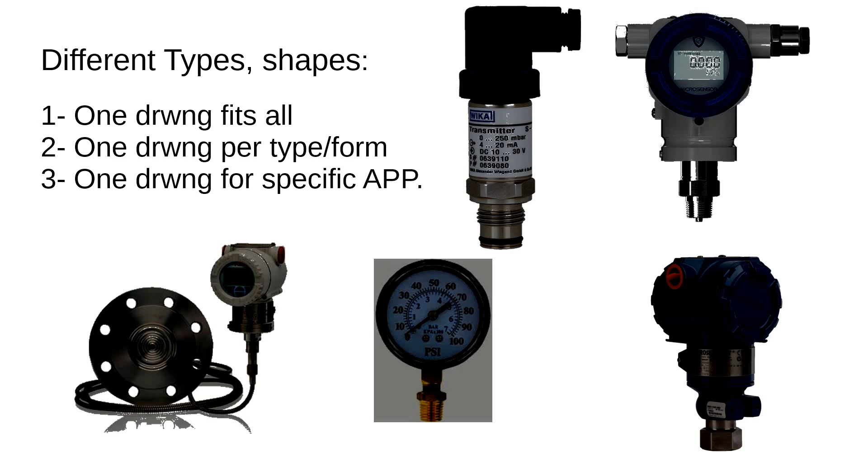Pressure devices come in different shapes and sizes. Our selection for a device depends on the application. The fluid in a pipe or vessel can be liquid, gas, vapor, or mixed. Some can be mounted directly on the pipe. Others, which have a diaphragm seal with capillary tubes or impulse lines, can be mounted remotely in a place that facilitates access for maintenance or provides better protection against high temperature, etc.

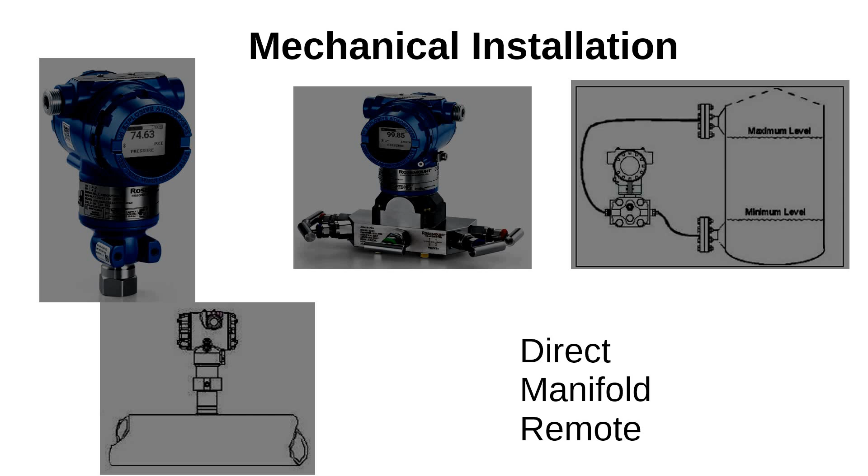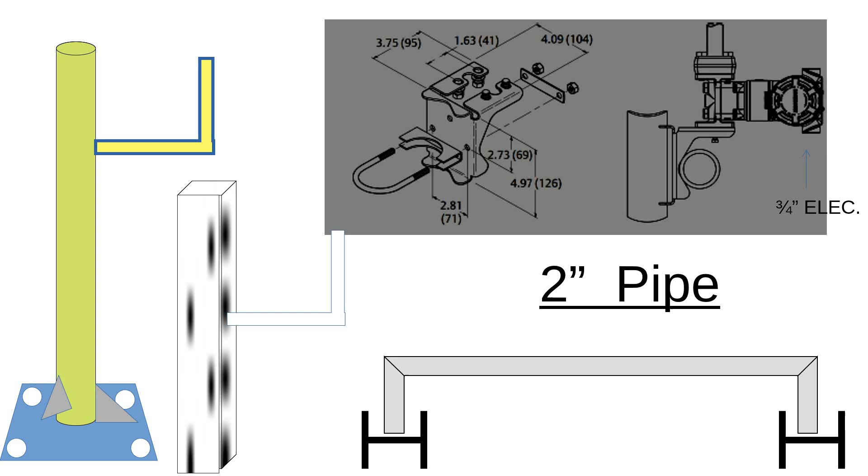Mounting the transmitter on a 2-inch pipe is one of the most used methods. A bracket is required, and there is more than one shape of these brackets. Since the 2-inch pipe stand can be used for almost any type of transmitter, the 2-inch pipe stand details should be explained in a separate drawing.

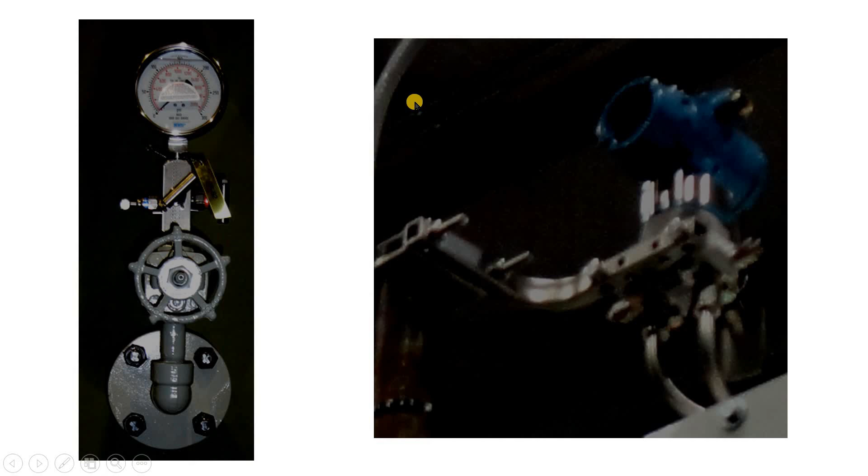Pressure transmitters are mounted on a 2-inch pipe between the structure beams. Here, the pressure transmitter is mounted on an L-shaped 2-inch pipe. Another shape of bracket for transmitter - the pressure transmitter is mounted using the L-shaped bracket. The pressure gauge in this case is directly mounted on the vessel. Please notice the isolation valve.

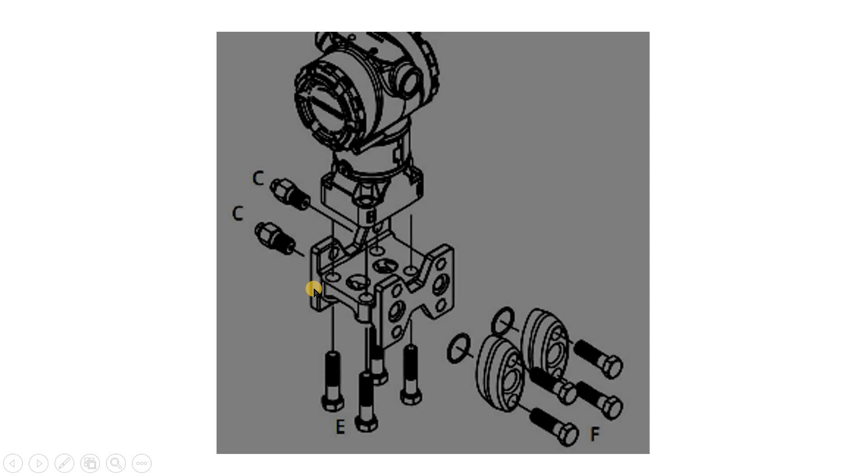If a manifold is attached to the transmitter, we can mount the manifold to the 2-inch pipe instead of mounting the transmitter itself. Here you can see two types of brackets together side by side: the L shape, and the normal or standard bracket, which we are used to seeing.

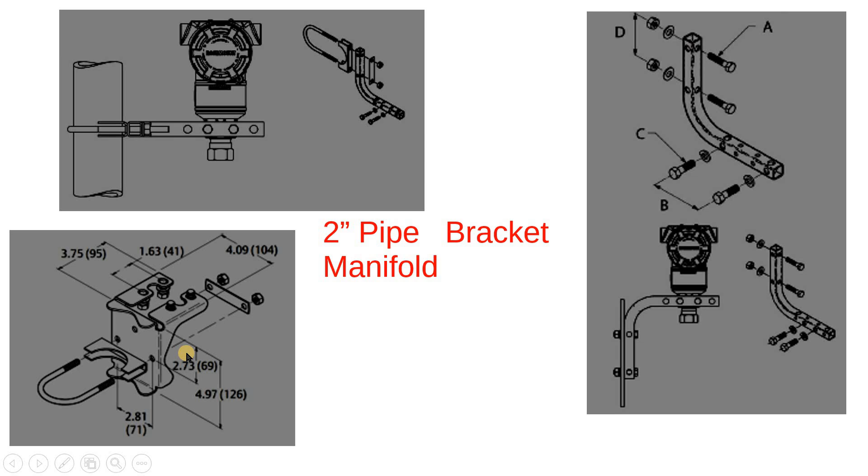Process connection: it is not recommended to install the device directly to the pipe. To maintain the pressure or do any maintenance for the device, you need to depressurize the line. Installing an isolation valve will not solve this problem, as there will be trapped pressure fluids between the valve and the device. So we need to isolate, and then we need to bleed this little piece between the isolation valve and the transmitter.

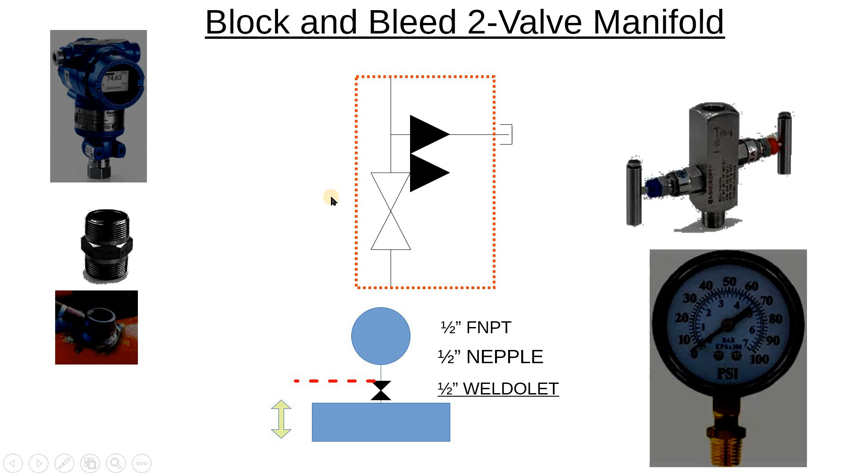This arrangement of isolation valve and drain valve can be achieved through piping or through a manifold. In most installations, the first valve on the line, pipe, or vessel belongs to the piping group scope. It's normally welded to the line, which will prevent accidental removal of the isolation valve, preventing something from going wrong. Anything above the first valve is in the instrumentation scope.

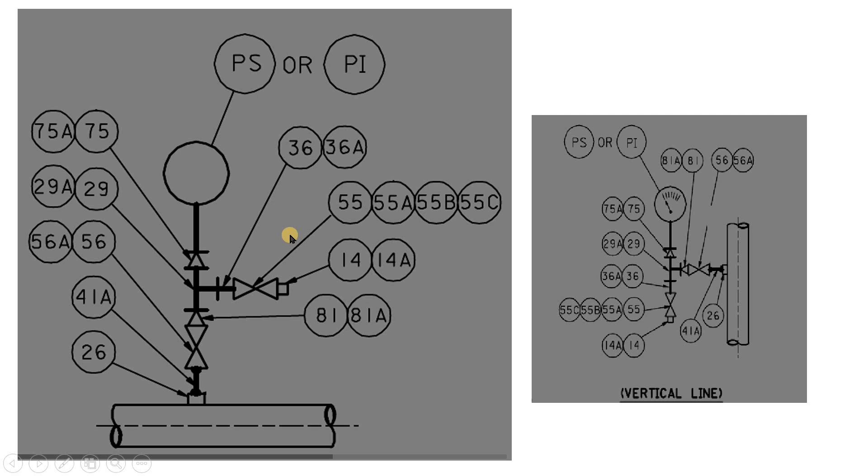Your starting points are the device and the pipe connections - this one and this one. Here the gauge is a 1/2 inch male connection and the isolation valve is a 3/4 inch female connection. You can work out whatever is in between those two fittings with fittings. You can see here, starting from bottom up: the first one is our isolation valve - this is the piping valve - and this is the instrumentation valve.

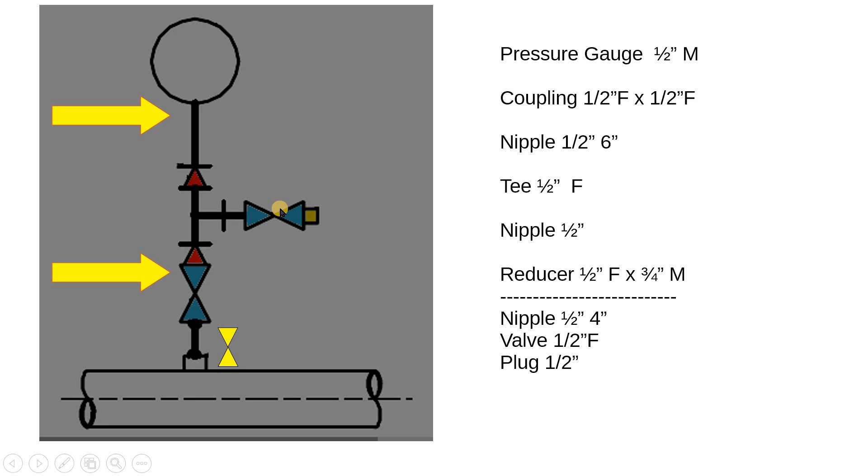So we can have the pressure gauge 1/2 inch, then we need a coupling which will convert the male to female, then a nipple, 6 inches, 1/2 inch, then you need a T, you need a nipple again, and then you need the drain valve, probably a reducer, and then a plug here. A similar arrangement can be seen here, but it's achieved by an isolation valve, or two-way valve.

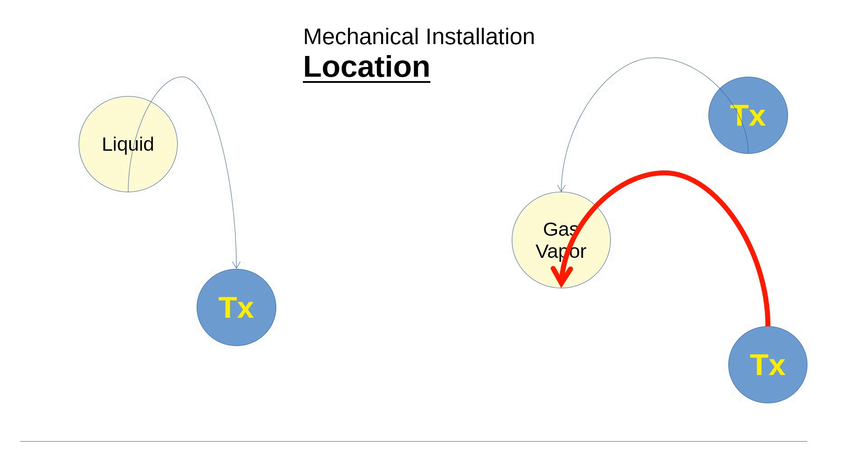For some applications, the location of the pressure device with regards to the process connection is crucial for correct device reading. For liquid service, the impulse line shall be free of air. For gas service, the impulse line shall be free from condensate. As such, the mounting location of the device, below or above the process connection, shall be studied.

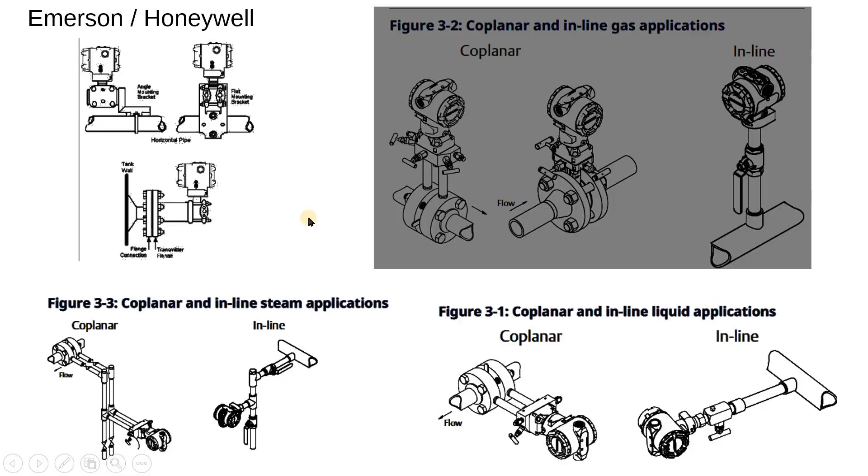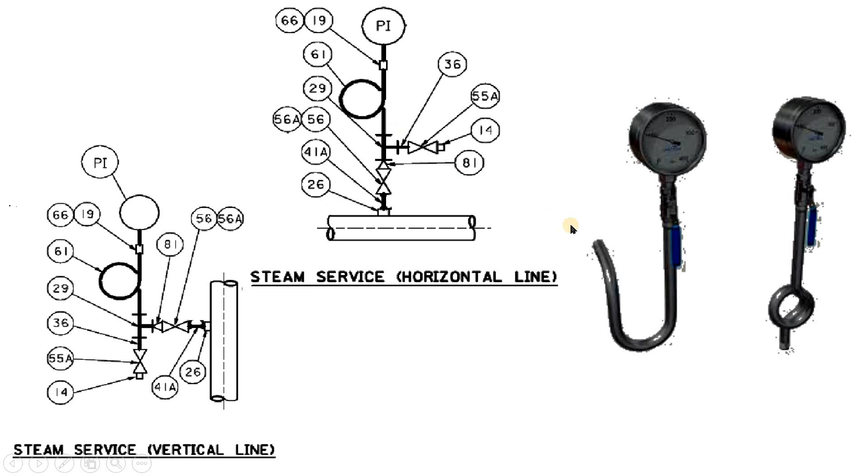Please refer to the vendor instruction manual, which will include a typical installation guideline for gas, liquid, and steam services. Steam service requires special consideration. For saturated steam, a siphon is placed between the measuring device and the connection to the line. The collected condensate in the siphon acts as a barrier between the high temperature of the steam and the device. As you can see here, they have different shapes of siphons.

In another application, we use what we call a condensate pot. In this condensate pot, you can see the excess condensate from the steam goes back into the line, so we have a constant head on top of our transmitter. You need to take care of this in your calibration. You can look at this arrangement.

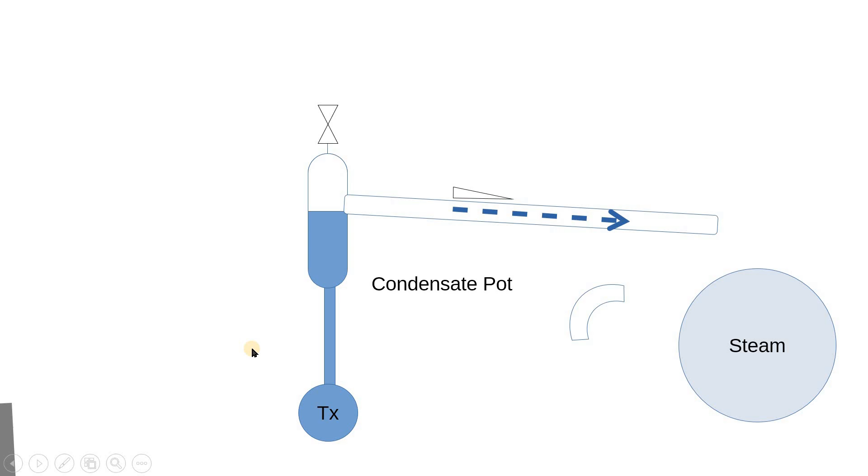You can see this is our line: the first isolation valve, a T transmitter, a valve, and this is, I think, a plugged connection here or tube. Sometimes it's open. What's happening is this can collect all your condensate above the valve. Then you open this to drain whatever comes from the line. If you have a dry gas, normally you have this arrangement, and then you can collect the gas here or you can collect the condensate.

For flow, you can see again you have the two lines here go side by side until they reach this manifold. You can see those two flanges, kidney flanges.

It's very important now to consider how you will arrange the fitting, assemble the fitting together. So assume you start from the tube or the pipe, you install this nipple, valve, another one, the T, go down and you go all the way.

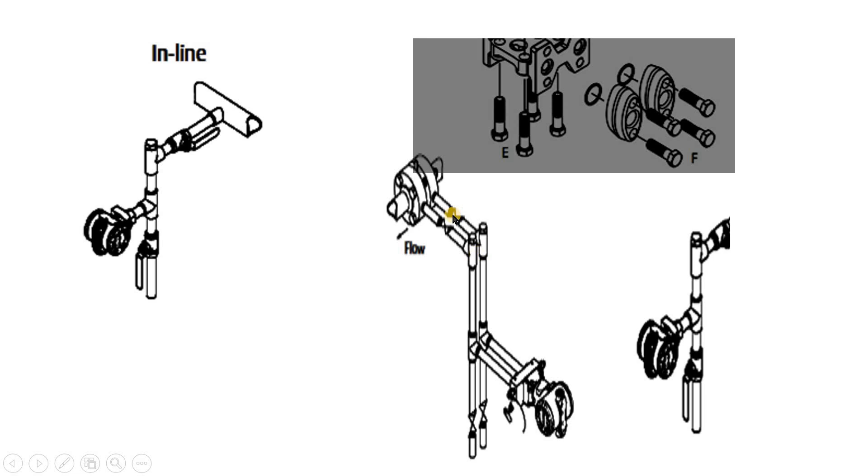It's so easy. You will have a problem if you have two T's beside each other. Now, one thing you need to address or understand is the fitting itself.

The fitting normally has NPT. NPT is the National Pipe Thread, which is, as you can see, like a cone. So the more you tighten it in, the more leakage-free the system.

The one problem you will face with NPT threads is each time you take it apart, when you put them back together, you need to retighten them probably a quarter turn from the previous location. What this means is if you align the system, the handle of the valve and everything in a certain way, then if you disassemble and reassemble them, the valve will probably rotate another quarter to half turn.

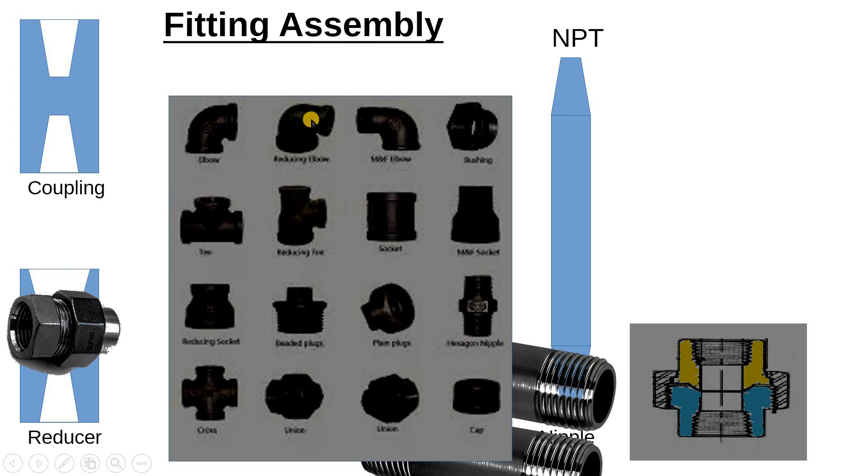Please study the fitting types: coupling, reducers, union, elbows 90 degrees, elbows where the in is female and the out is male. Sometimes you will find an elbow and reducer at the same time.

If you look at this arrangement again, this is, as we said, a dry gas setup. Here we have the problem: when you install the first line, there's no issue with the first leg. When you go with the second leg, you can see if the distance between those T's is very close, then you will not be able to rotate the second one.

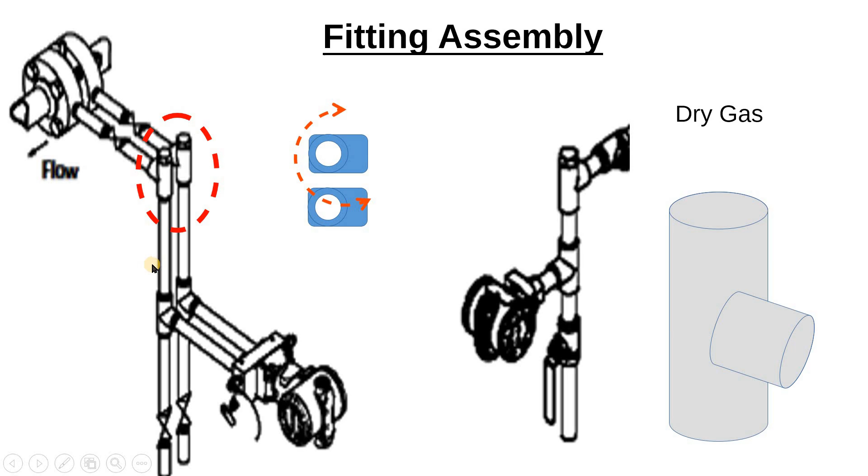So this problem you will see in many pipe fittings. What we do if you have this scenario is go ahead and install a union. There are many fittings available for impulse lines. Please study them prior to designing your hookup drawing.

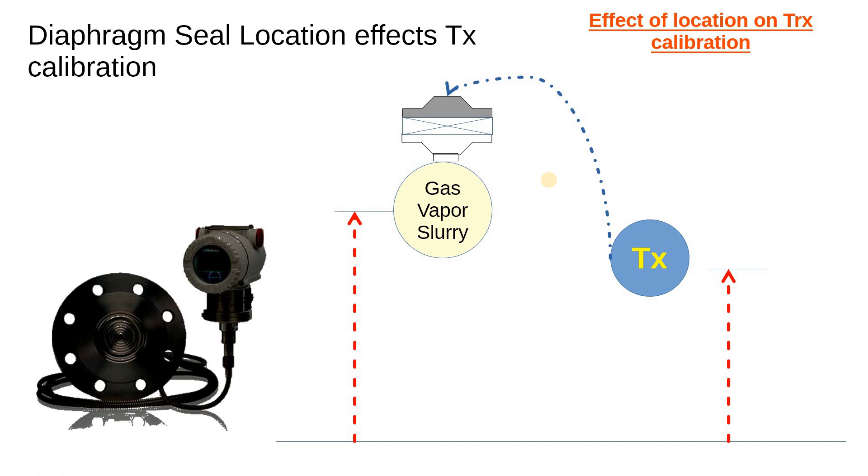Compression fittings are different than piping and so on. For applications where a diaphragm seal with a capillary tube is used, please pay close attention to the measuring device location. Look at the codes and the standards, you may find some requirements.

This is a recommendation from API as a recommended practice to have the tubing, or as they say, you can see here they put that alternative arrangement manifold valves.

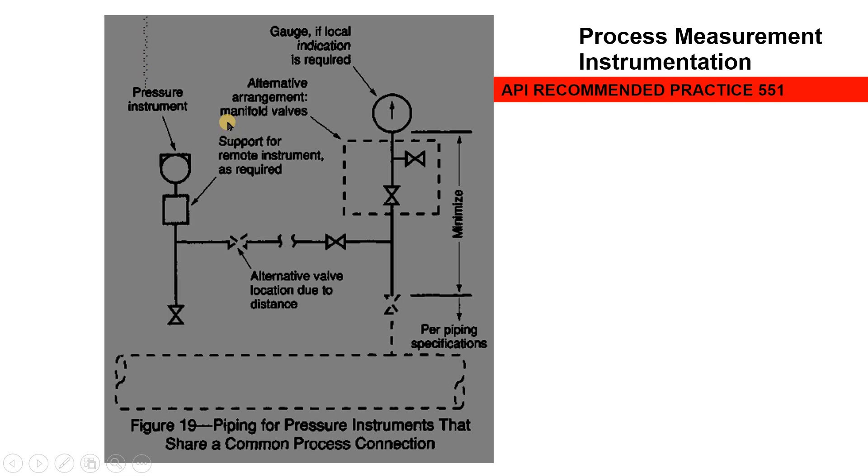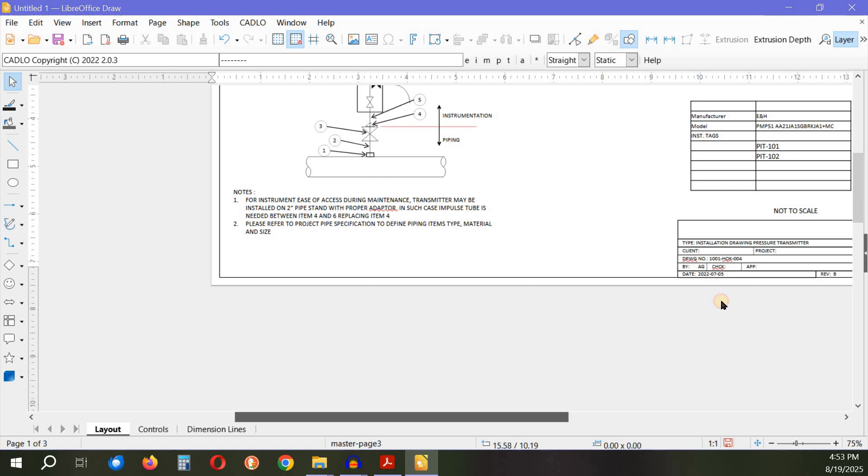Here we can see an example, an actual hookup drawing developed for pressure transmitters and pressure devices. It's exactly the same as a pressure transmitter, pressure gauges, or pressure switches. You can see in this area you have the device, the demarcation, and also the numbering. So all you have to do is remove this piece, the transmitter, and replace it with a pressure gauge.

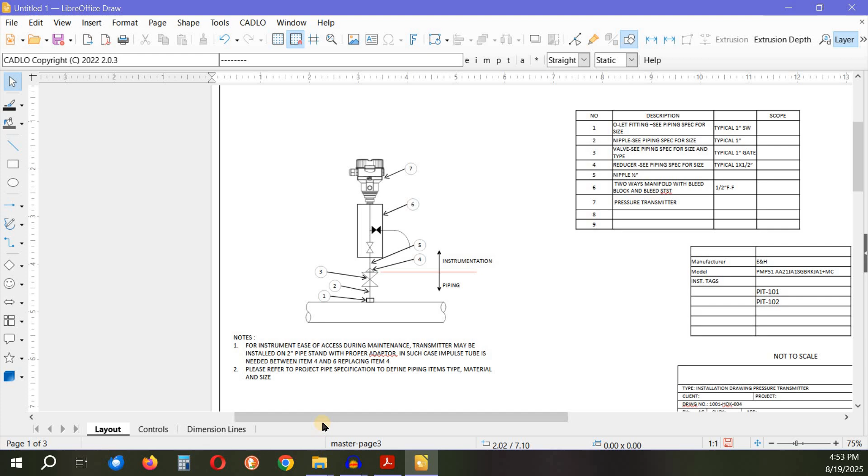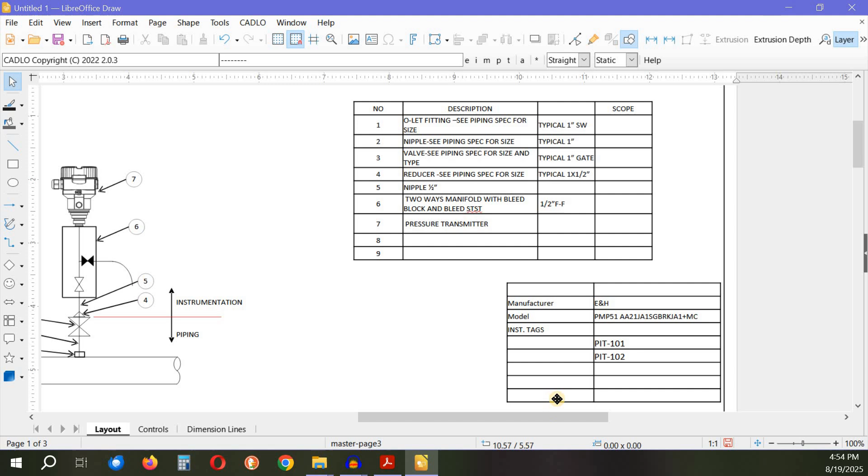Then here we have a note, whatever note you want to have, and then we can have the scope, the description for the fitting, and the model number if you need it. Then you get the scope, who is going to supply this fitting: field contractor, site contractor, free issue to the site contractor, company 1, company 2, and so on. Sometimes you also have the manufacturer of the device and the model number.

If you can see here we have some tags. For this project, which was a very small project, we have only two items for the pressure transmitters, so we include the tags here. For a bigger project, when you have hundreds or thousands of transmitters, we include the hookup drawing in the instrument index against each tag, so you will know which instrument goes with which hookup drawing.